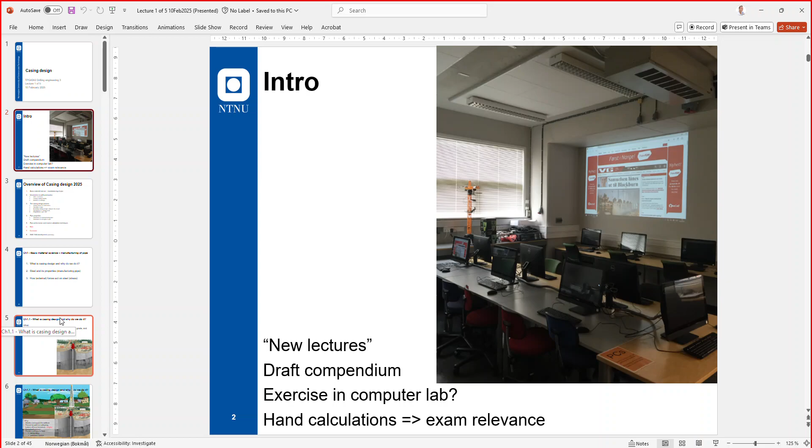With that said, I'll jump to it, the first slide relevant for material design and casing design. Basically the question: what is casing design and why do we do it? The answer is that it's the engineering process of designing the required size, grade and placement of casing strings. That's basically what it's about.

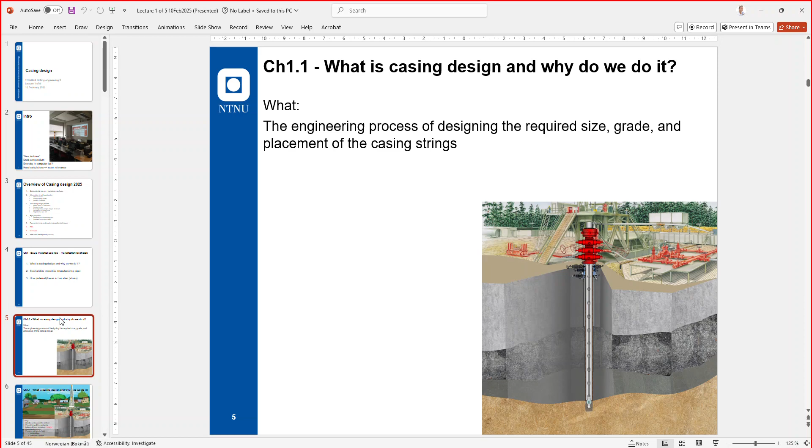Asking why: it is to stabilize and support well bores, preventing the well from collapsing, isolate different formations, and create integrity. I hope you all have a good understanding of integrity. It's one of the major tasks, going on from early planning of a well until the very end, the permanent plug and abandonment.

What we do in casing design is look into and simulate absolutely everything we think may, with low or even high probability, happen to our well. Then we simulate all of these cases. When we do the hand exercise later on, there's a specific situation we're calculating. When we do the exercise using the software, we have to simulate all these specific cases. These specific cases have a specific name, and I'll get back to that.

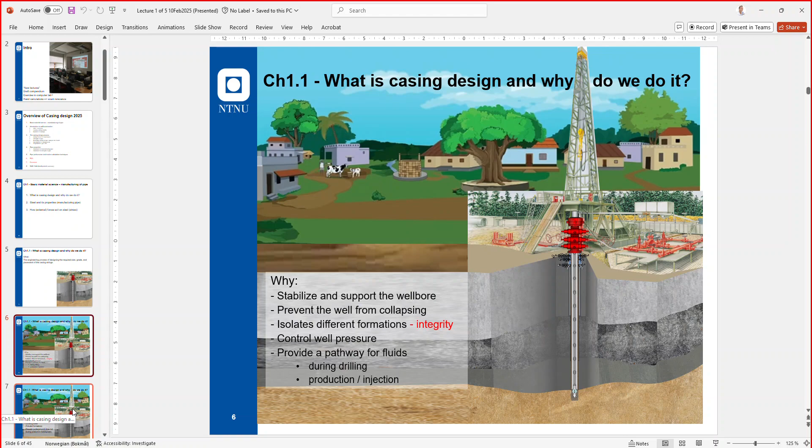When it comes to integrity, there are many aspects to consider. This picture in the back shows that, especially Norwegians used to having oil and gas industry offshore - in many cases onshore, wells are drilled through aquifers containing drinking water. It could pollute formations that go a long way into, say, a drinking water source later afar, or formations that come up into the ground level, things that are linked together.

Say a formation containing salt water connects subsurface into something that goes up into the day - these things we need to prevent. One thing that may happen is an underground blowout. If you link two formations, one high pressure and one low integrity, low consolidation, or just plain weak, you may have a situation of an underground blowout.

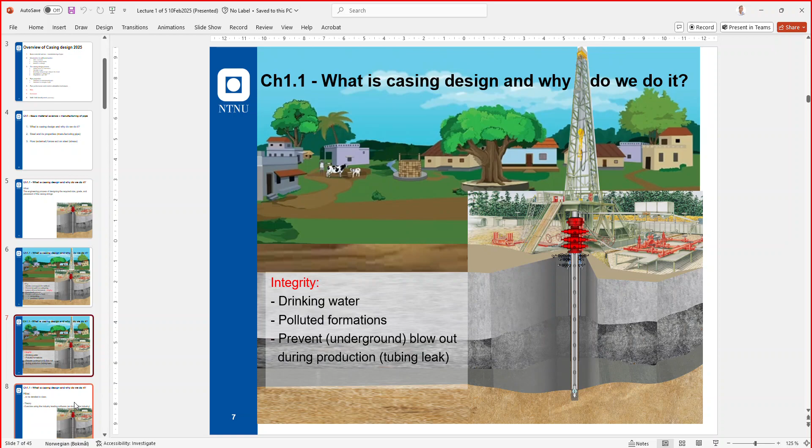Integrity is a very big topic. So, what, why, and here arrives the how - how we do it, we will of course detail in this class, and eventually arrive at a good overview of how we do it.

We will of course start with the theory, the basic theories, the calculations, because software may sometimes give you an answer you don't really understand or misunderstand. What's important is to have the basic understanding of casing design so you know how to use the result from any software appropriately. And of course, software is software, and it may sometimes actually give you the wrong answer, so you need to be able to detect that.

As it says here, the best overview is actually to do the theory, and then do your hand calculation - that will be your assignment, exam oriented, one specific case, one situation in the life cycle of the well that you're calculating. We call this a load case. But when you go to the software, you're simulating all these scenarios, all these so-called load cases. That's going to give you the best overview of what casing design is.

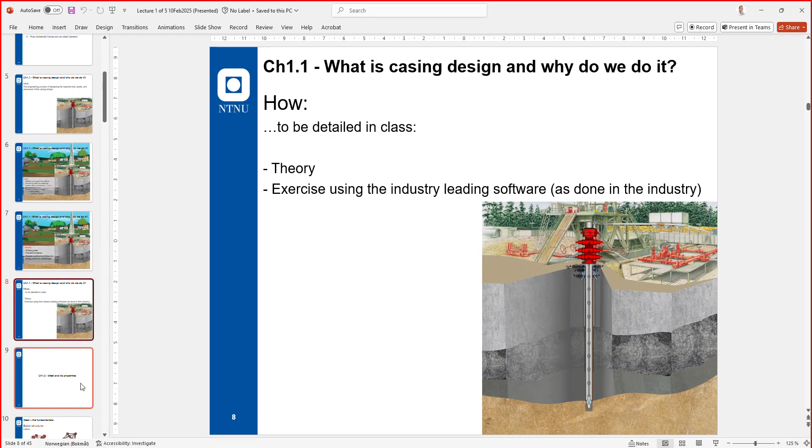We will now start on the theory of material science. We're going to discuss steel and its properties, and go into detail at the molecular level, atomic level.

Many of you remember from early chemistry classes how atoms are put together into molecules. Now, steel is a metal, and metals are set up in specific structures, not like single units the way a water molecule would be. They are in a lattice, meaning a long, homogeneous, systematic unit. What we do to understand this lattice is set up what we call a unit cell.

For metals, the most common structures are the two we see in this picture, BCC and FCC. The FCC - I forget what BCC stands for exactly - is face centered cubic, and FCC is simple: the one on the right has 5 atoms in the plane closest to you, and you can rotate that cube any way and it still has these 5 steel atoms on the plane close to you. The BCC has 4 atoms in the outer plane and 1 atom in the center of the unit cell. The FCC doesn't have anything in the center. These two units are the building blocks of steel, and they present different properties - steel behaves differently depending on whether it's in the BCC or FCC structure.

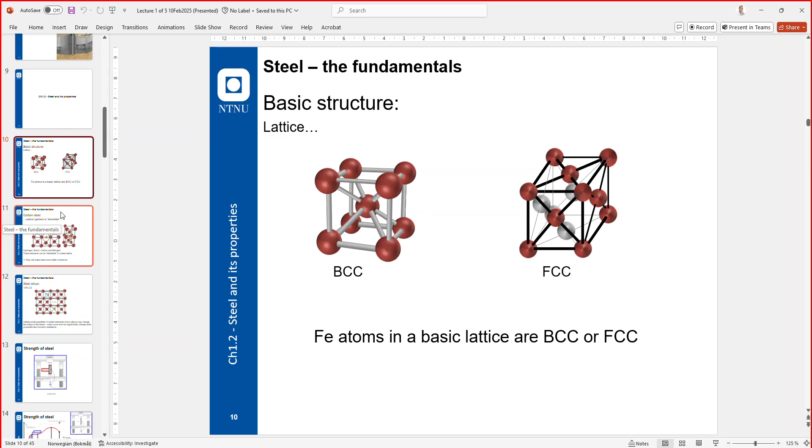I see a hand up, please ask. No, everything is okay, you were just trying to know the meaning of BCC earlier. Thank you, I just wanted to say it, but everything is okay. Yeah, body center, that's what it is. Thank you, so body center, body centered cubic, thank you. Just out of curiosity, have you been looking into material science before? Is this new to you, or is it old stuff?

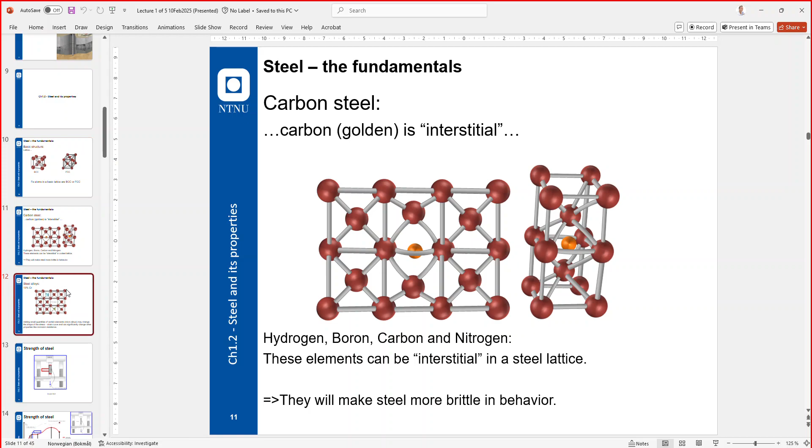Other connections that influence steel - we all have heard talk about stainless steels. Typically what we call stainless steel, it starts with an alloy of 13% chrome. There are different things on the internet saying it starts at maybe 12, maybe 11 in some places. It could be others, but in many cases in the oil industry we use 13% chrome. Then we say it's a stainless steel.

Now we're going to talk more about the structures of steel and how they become stainless, or call it develop corrosion resistance when you add only 13% chrome. We can talk about that later - if I should forget, remind me, and I will get back to it. The reason why I want to wait is to give you a little bit more structure to build on and understanding, and you will more easily see it.

What we see here now would be substitutional alloys. Anything but the 4 small ones would typically go into the lattice. There are many types of atoms that easily form and go into and substitute steel atoms, and chromium would definitely be one of them.

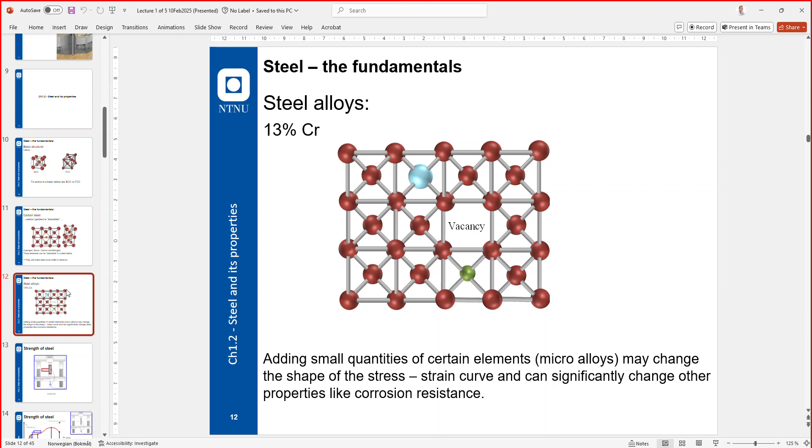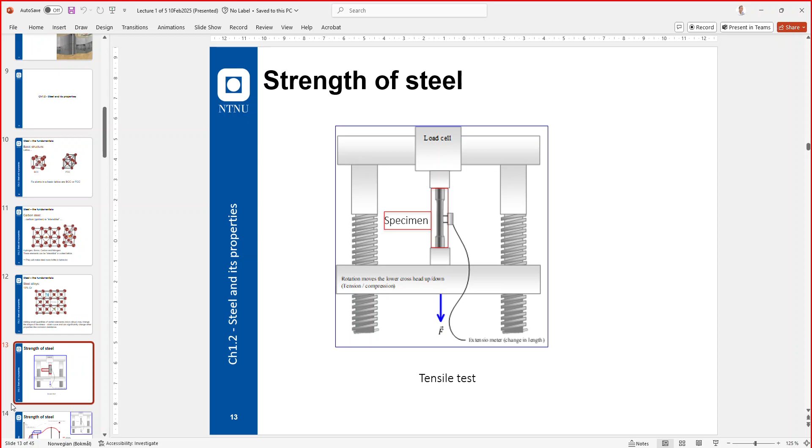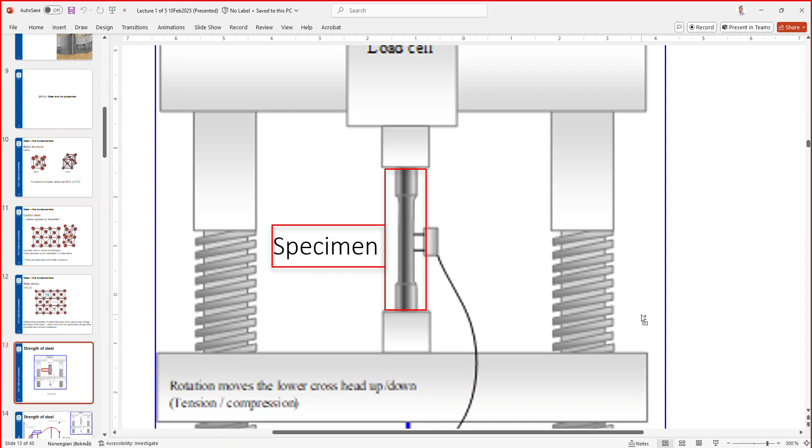What we're seeing here is a load cell. I'm going to zoom in a little bit. These are used in order to test the strength of steel. What we see here is basically a test specimen. It has an elongation meter attached to the body, and you see it's a load cell where you stretch the specimen, elongating it by moving the lower block, the upper one being stationary. You're measuring the force and the elongation at the same time. It's a load cell.

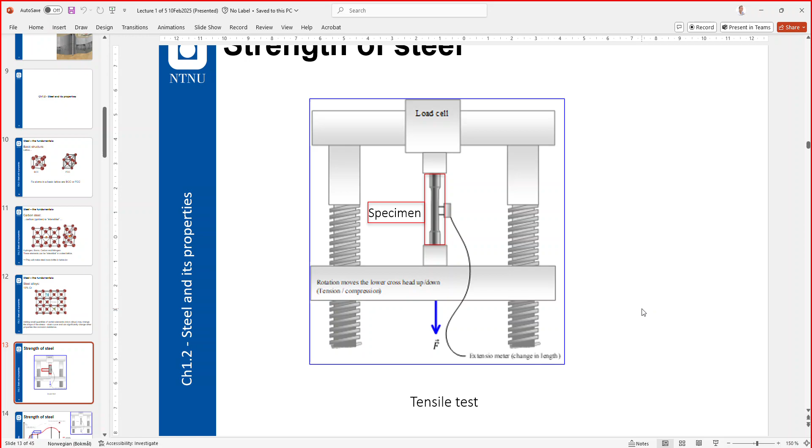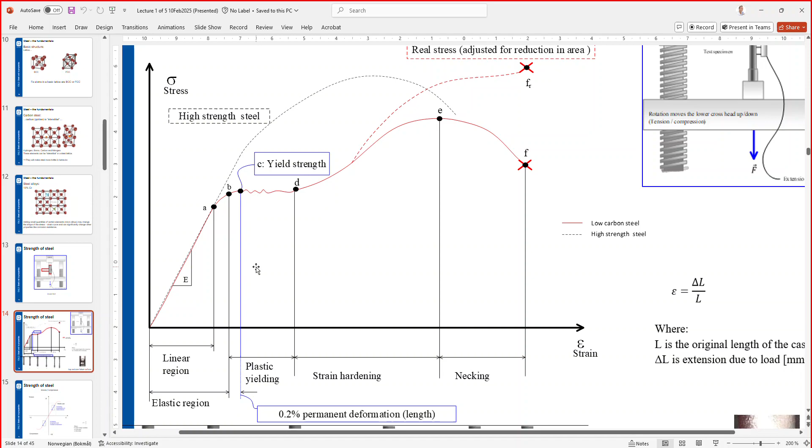We have a complete linear region all up until point A. You stress it until point A, and then you relax the stress, and it will go back to its original shape. You will say that also about B, meaning it doesn't have a linear part, but still it goes back to its original shape, and then you stretch it a little bit more and you get to the yield point C.

When we stretch it beyond point C and go to point D, we have what is called plastic yielding. Steel is the only metal I know of that actually has this - there might be others, but I haven't really seen that specific dip in the stress strain curve for any other metal. I might be wrong, but I've just not seen it. This dip, as it goes beyond point D, starts building again, and that's when you get what we call strain hardening. That's an interesting part, because the steel actually behaves as if it is stronger if you relax it from this part.

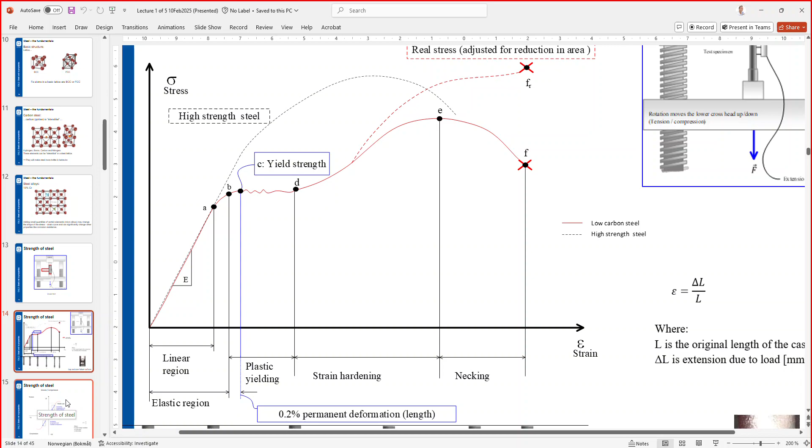We often get into this area, and we need to look into how to deal with that after. We'll get into casing manufacturing after the break, which is kind of imminent now.

Steel is homogeneous. It means that when you stress it, and yes, it's Hooke's law, like you see here, the Young's modulus. It's the stress over the strain.

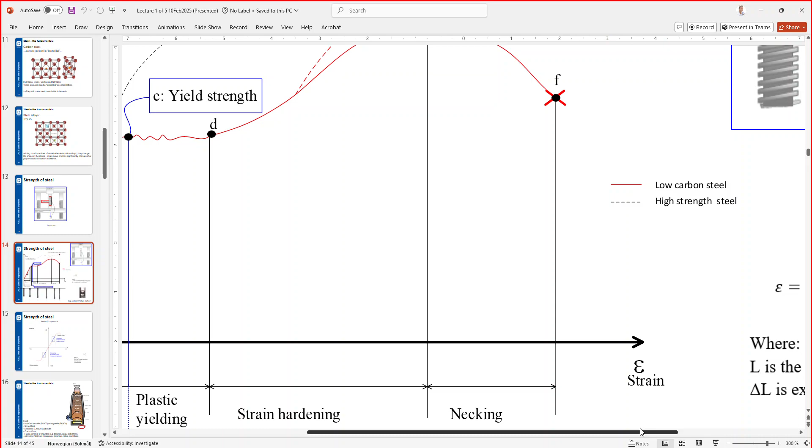We saw the formula for strain in the previous slide. I can go quickly back to it so you can see it again. It's the stress creates a strain, which is the delta elongation divided on the complete length, original length. Extension due to load, as it's described here, at the original length.

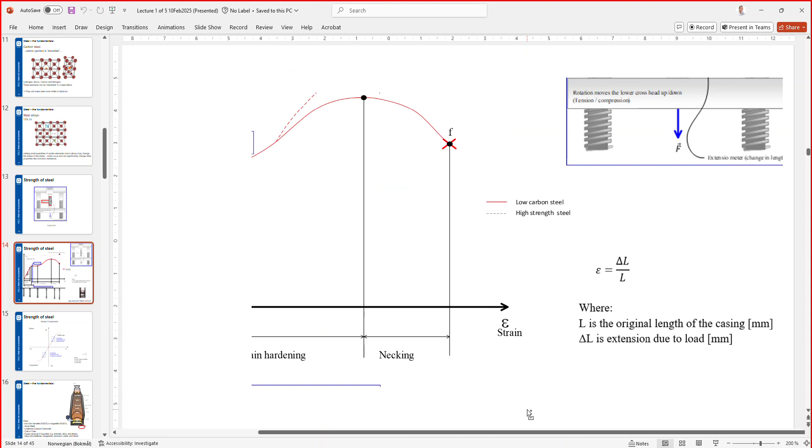And that behavior also is the same in compression. That's how it is.

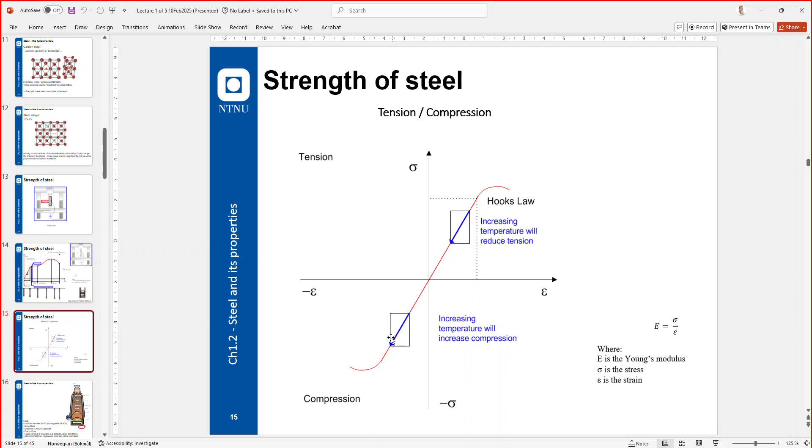We will quickly talk about, in the last 2 minutes before the break, how to create a steel, how steel is being made into the fundament of a piece of steel for casing.

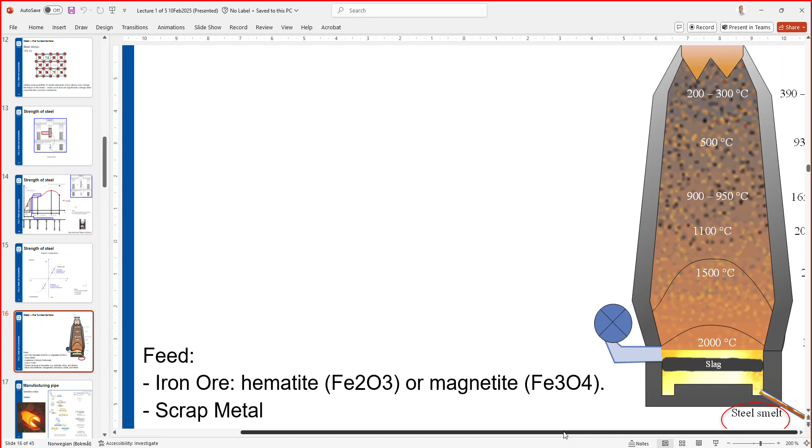Maybe not so very visible here. The furnace, it has different temperatures. In the top, it will be typically around 200-300 degrees, 500 further down, and so on and so forth, until you get to something like 2000 degrees Celsius or 3600 and some degrees Fahrenheit.

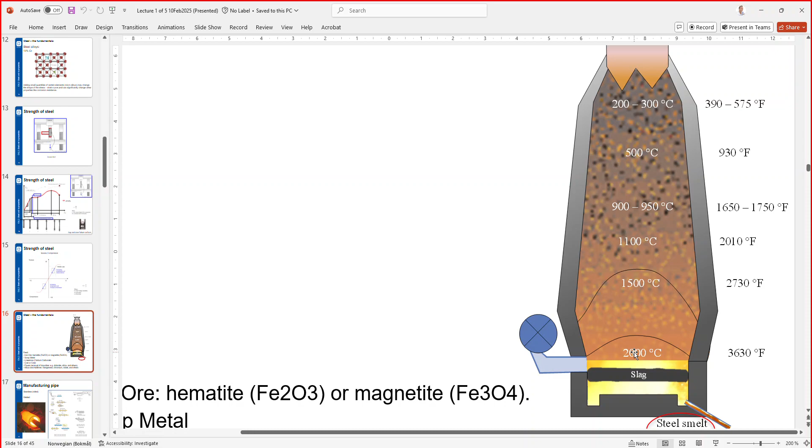In the bottom is a pure liquid steel melt, and that's where we take out what is going to become a piece of pipe, a casing.

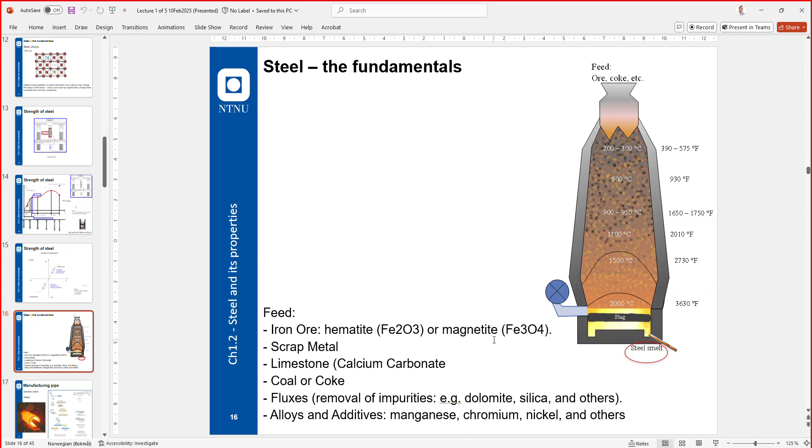And with that, I'm going to take a small break, and we'll continue looking into the steel properties, and we will get more into the details and investigate more how this process that you're seeing here of making casing, how that is being formed at the atomic and molecular level, if you can talk about molecular levels in a steel lattice as per se. All right, any questions before we -- yeah, go ahead.

Yes, I have a question regarding the mechanical behavior of steel. You were showing the graph of stress against strain. I remember there's something called ultimate tensile strength. Is ultimate tensile strength the same thing as the strain hardening here at the failure, and the yield strength is here?